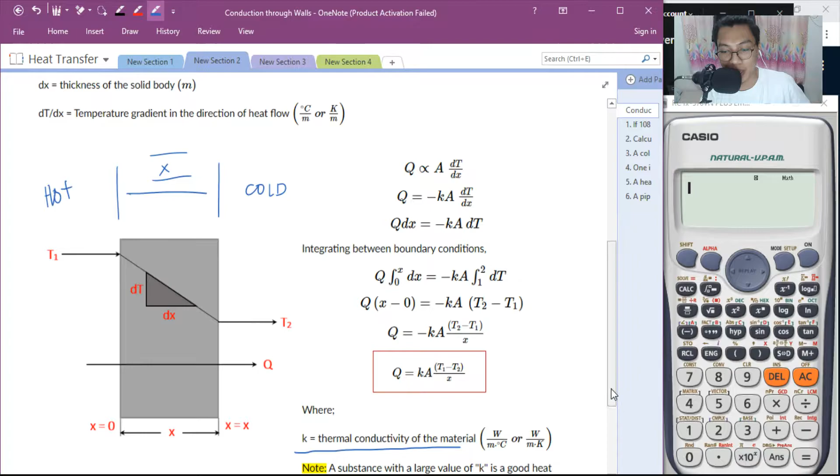What do you call that resistance? That is the thermal conductivity of the material. And it is often measured in watts per meter degree Celsius or watts per meter degree Kelvin.

Note that a substance with a large value of K is a good heat conductor. One with a small value of K is a poor conductor and a good insulator. That means a good conductor is a good heat transfer material when its K or thermal conductivity is high. But if K is very low, it's better as insulation. You have to consider that, and every material has a different thermal conductivity. There's material where no matter what you do, it will not conduct heat because its thermal conductivity is very low.

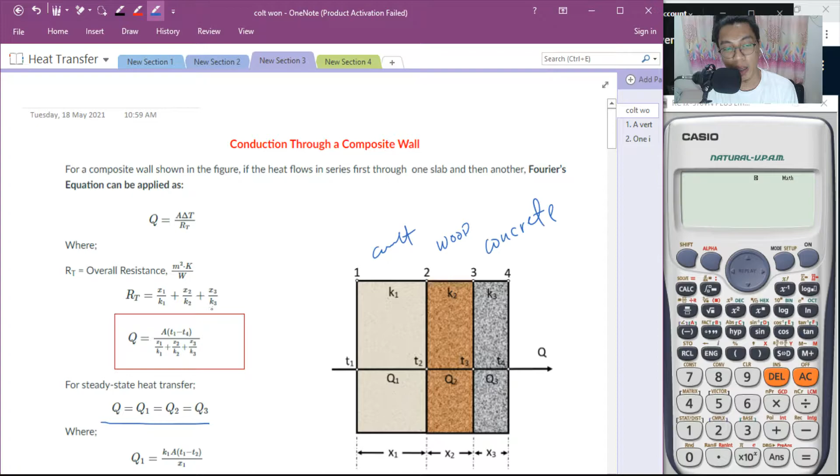Kung mapapansin mo, the flow is in series, kaya nagkaroon tayo ng series resistance. Sir, ano ba yung series resistance na yan? The overall or total resistance is the sum of all the thicknesses divided by the individual thermal conductivities of the material that is present on the wall.

So now, the resistance is, simply we put it this way. This is the overall total resistance. Yung conduction through composite wall is equal to the area multiplied to the temperature difference from hot side to cold side, divided by RT, where RT is the overall resistance, or the sum ng ratio between the thickness of the wall and the thermal conductivity.

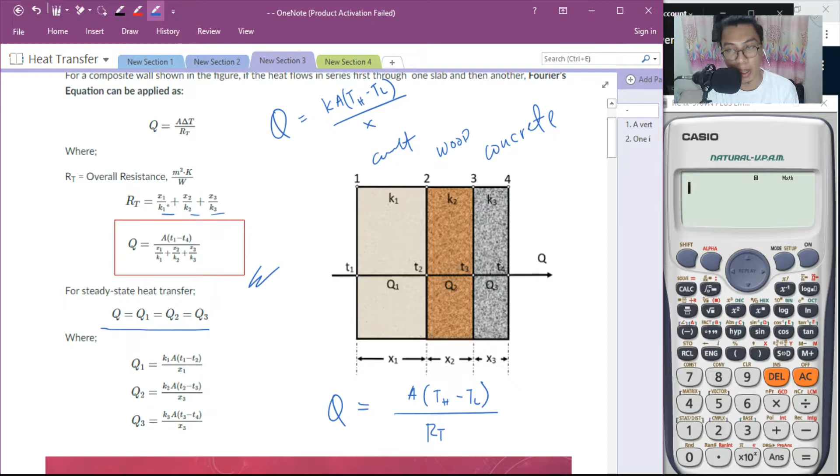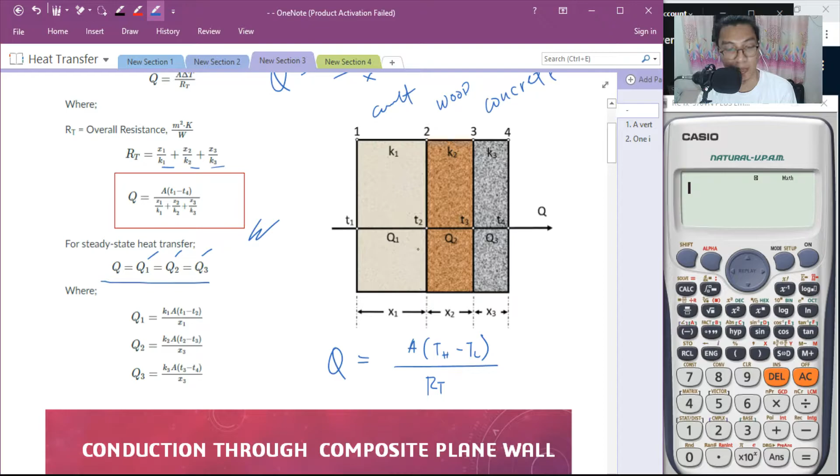Where at steady state heat transfer, the total Q is equal to, since they are in series, parang piping. Pag series, Q is equal, so Q1 is equal to Q2 equal to Q3. What's the only difference? Yung K mo iba sa bawat isa, and then yung thickness is iba sa bawat isa. Siyempre, equal man sila ng magnitude in terms of heat, magkakaiba pa rin yung transference ng temperature. And that is the conduction through a composite wall.

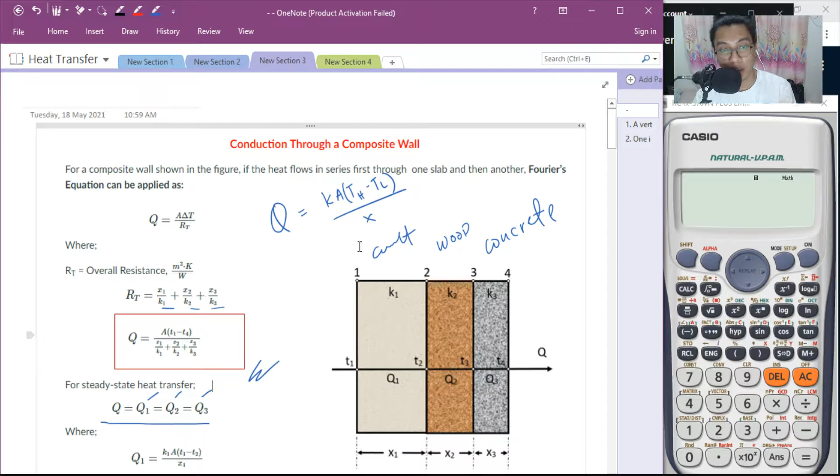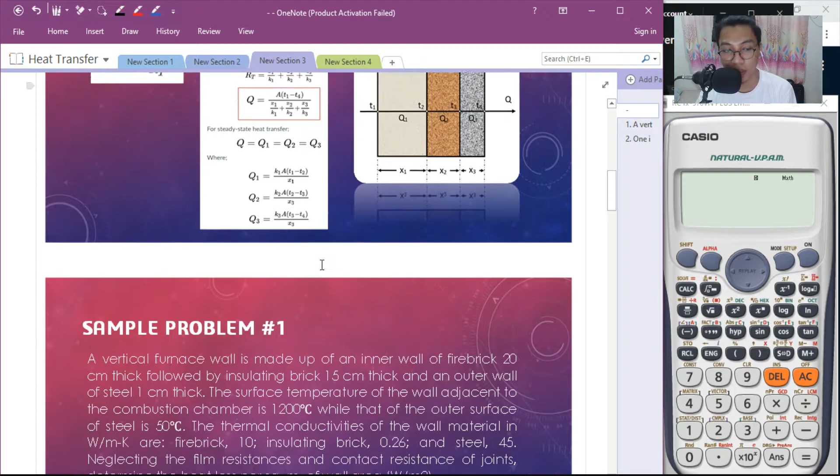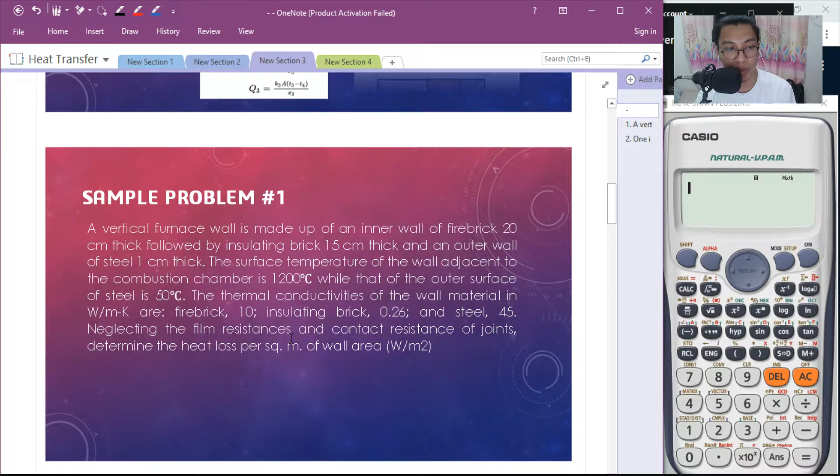Better way, naipakita natin yung solving na yan, naipakita natin yung notion kapag nag-solve na tayo ng values. Ito yung summary, and you will get the entire notes after the discussion. So you have here a couple of sample problems. Try niyo itong sample 1, this will be your activity. And sample 2, yung activity ulit.

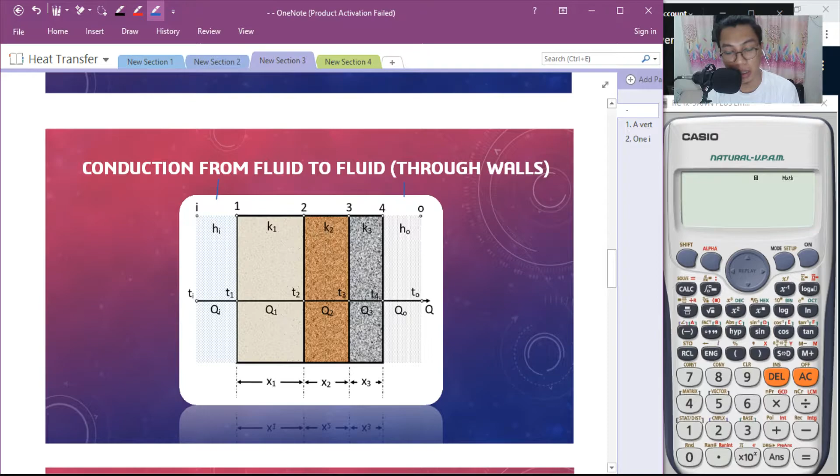Okay, let us go with conduction from fluid to fluid. Problema dito, hindi lang naman yung conduction mo is from wall to wall. Kailangan mo ring i-consider yung ambient air dito, and then the air inside or outside. So considering them, with the conduction through plane wall, iko-consider mo rin siyempre yung surface film conductance on the hot side, and then surface film conductance on the cold side.

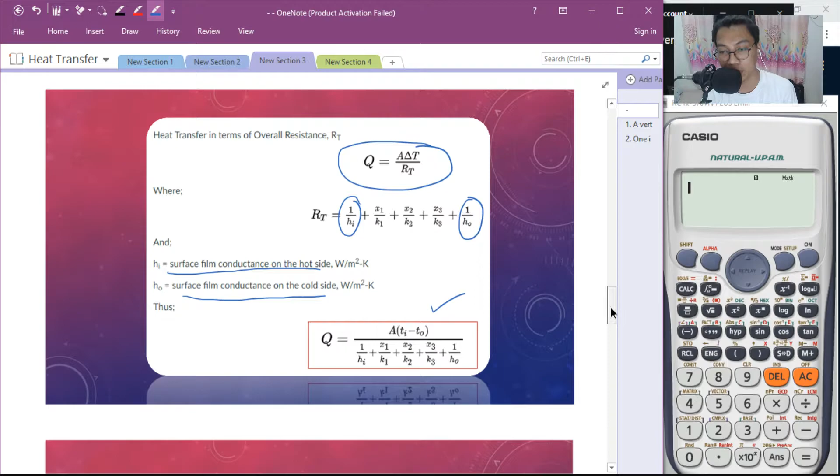Yung RT mo, itong RT na to, or the total or overall resistance, idadagdag mo ito. Pakikita ko sa inyo yung best way para isolve mo siya step by step, kasi pag nag-input ka na nito, napakahaba na nung equation. Ayan yun, so na-finalize siya.

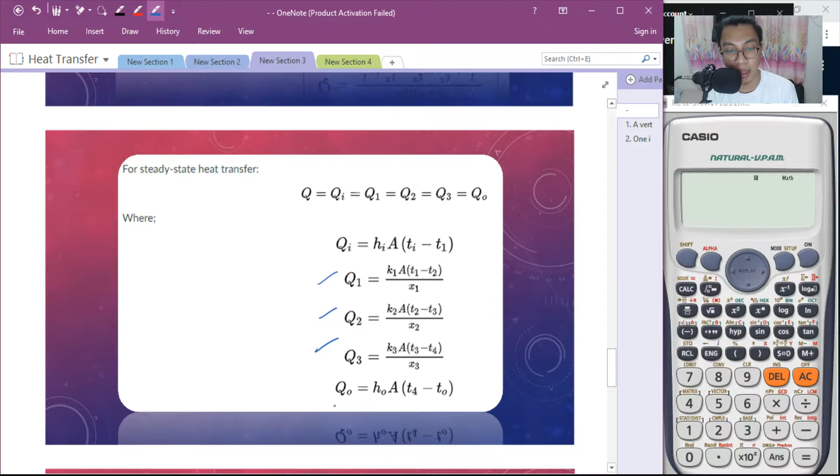With fluid to fluid, same pa rin naman, equal yan. But yung Q mo is equal to, kapag ito, kinonsider mo yung labas ha, tsaka yung loob. Ito, itong side na to, and then yung side na to. Yung Q there is equal to, may iba lang equation.

Ito yung sa walls, ito yung sa film, ito yung sa film. So HI, A, T1, TI, T1, ito rin yung sa outside. Makikita nyo mamaya pag sinolve ko yan.

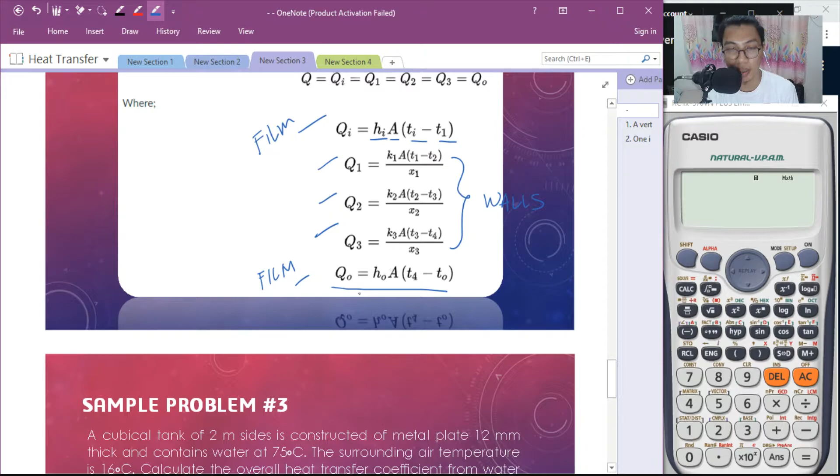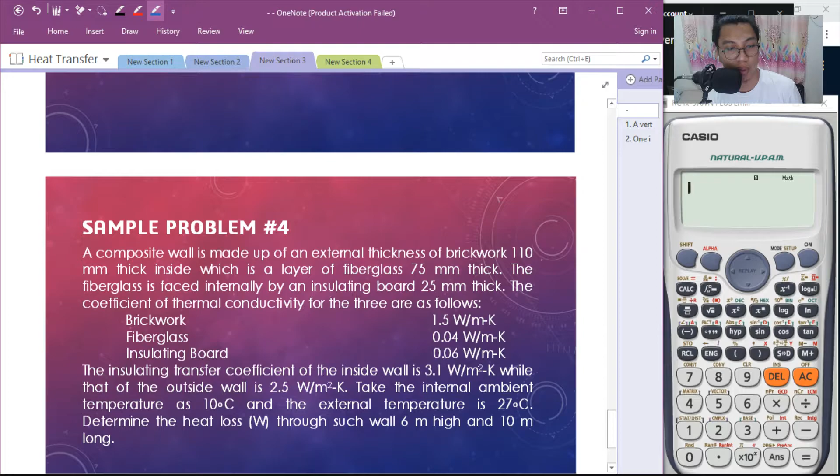Ito yung sample problem, you might as well check it. But recorded na to, recorded na siya. So what better way for us to understand it is to solve the entire problem. Isosolve ko siya, okay?

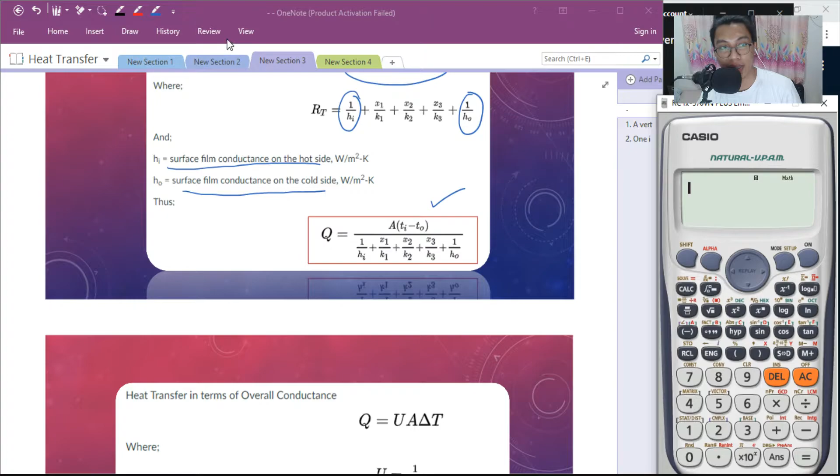So let's go to the problem sets. I have here actually 6 problems involving yung heat transfer of conduction. Okay, so let us solve this.

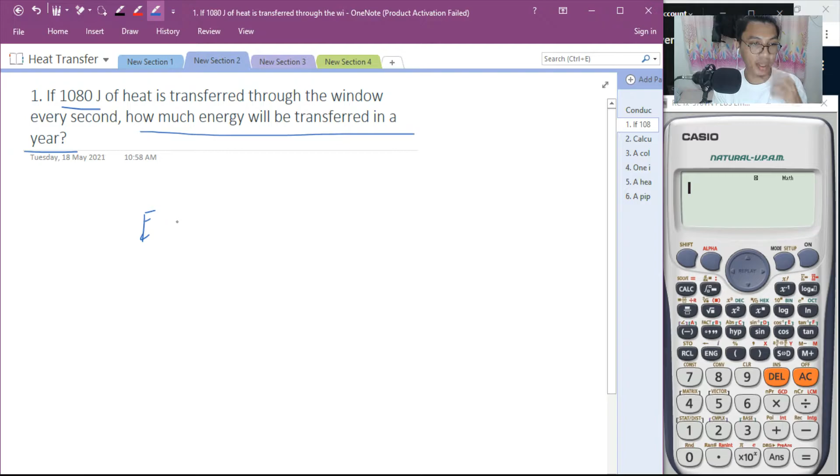So for problem number 1: if 1,080 joules of heat is transferred through the window in every second, how much energy will be transferred in a year? Di ba ang energy is measured in joules? Ang binigay sa'yo dyan is power. Tama, ayan o, the power is heat power.

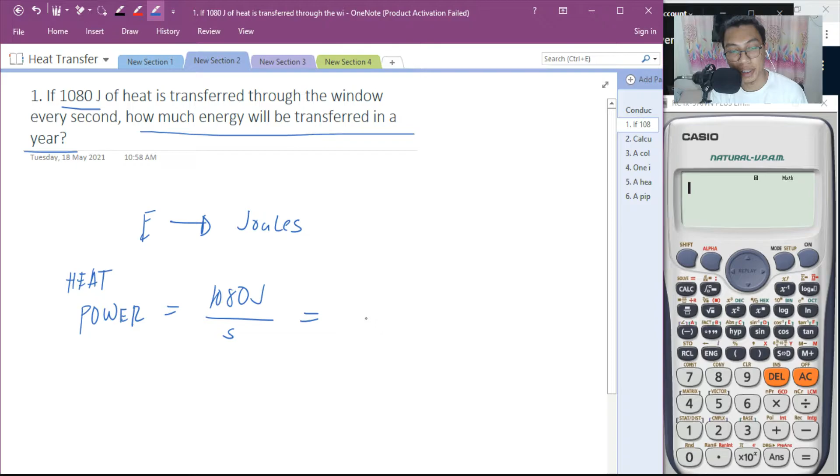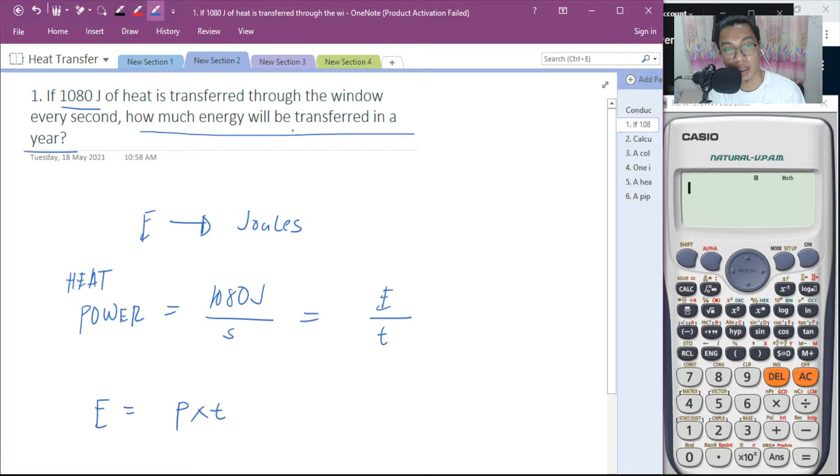So that is 1,080 joules every second. Ang hinahanap natin is the energy. Di ba ang power is equal to energy over time? So energy is equal to power times time. Ngayon, ang hinahanap natin dito is the energy transferred in a year. Very basic. So energy is equal to yung power na ibinigay sa'yo, 1,080 joules over second. Ngayon, ah, nakalimutan ko yung diretso.

Mamaya maalala ko rin yun. So, daanin natin doon sa mahabang proseso.

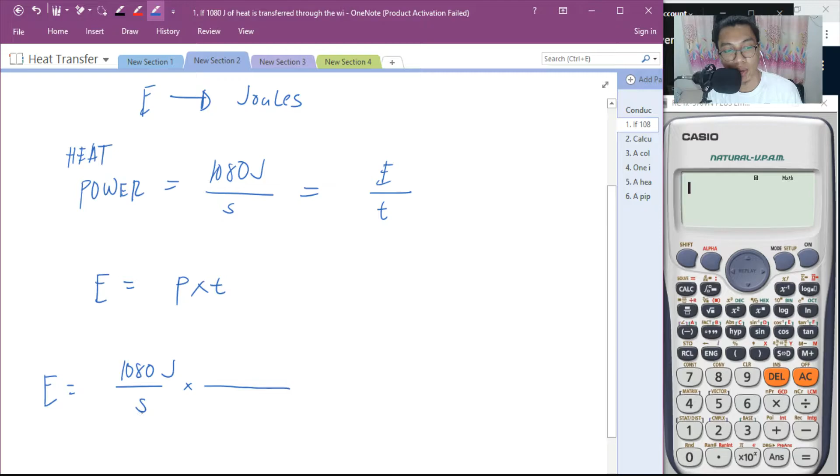Okay, so you have 60 seconds in every minute, or 3,600 seconds per hour. Ito na yung pinakamabilis. Tapos you have 360 days per year, kapag ordinary, pero pag exact, ginagawa natin 365. Tignan natin kung ilan yun. 365 times 24, days sa hours. Yan, 8,760. Tama nga. There are, in 1 year, 8,760 hours. As in 1 year, you have 365 days.

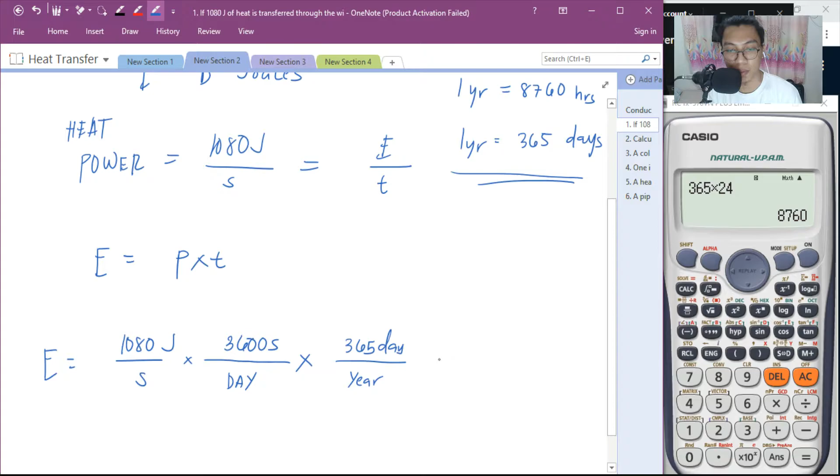Normal na yung conversion na yan. Now, ang hinahanap natin in 1 year. So multiply natin yung time. O di 1 year. Cancel yung seconds, cancel yung seconds, yung day, yung day, yung year, yung year. So you have how many joules? 1,080 times 3,600 times 365. Yan na yung pinakamabilis.

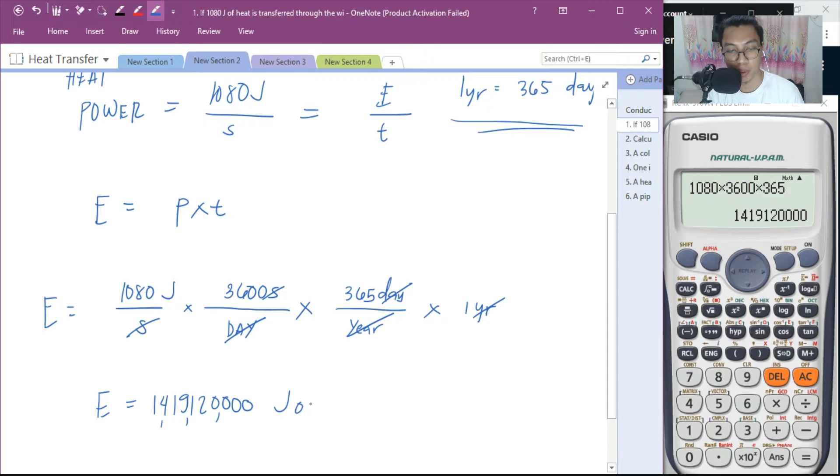Okay, the answer is, ang laki no, nung energy is equal to 1,419,120,000 joules. Yan yung energy transferred in a year. So that is for problem number 1.

Very basic lang yan. How about problem number 2? Calculate the energy transfer rate in W/m² across a 6-inch wall of fire brick with a temperature difference across the wall of 55 degrees Celsius. The thermal conductivity of the fire brick is 0.65 BTU per hour degree Fahrenheit.

Sir, meron ba tayong conversion unit dito? Yes, we have a conversion unit there. Lo and behold, sasama ko na yung pinakamabilis na paraan para makalculate mo siya.

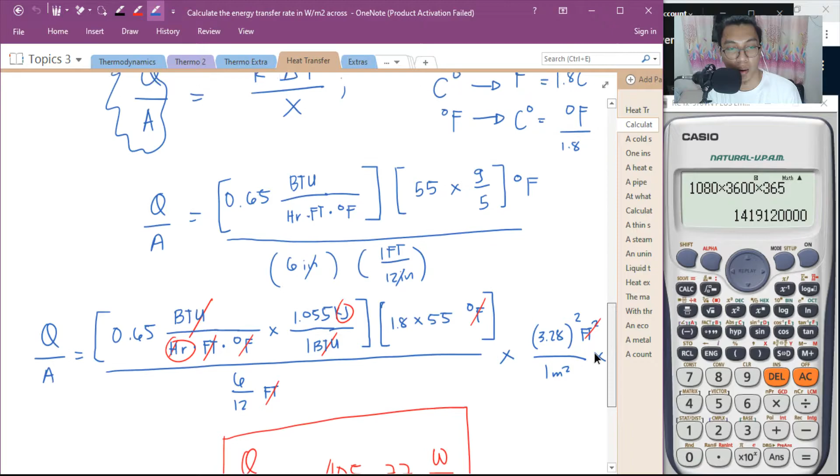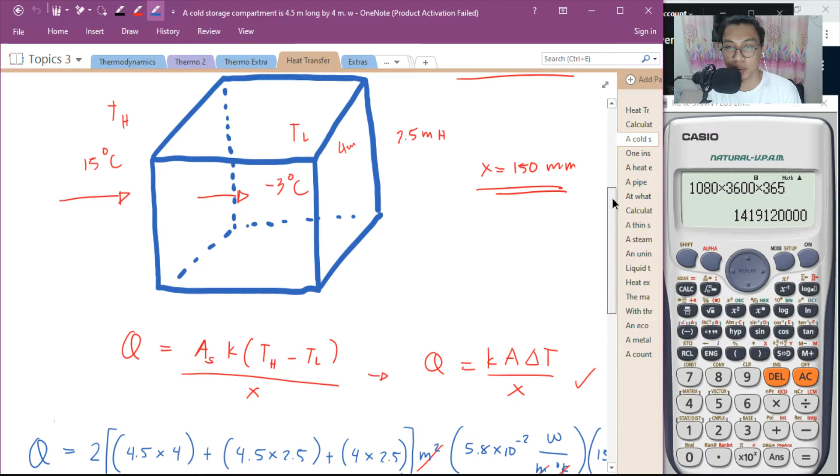Alam ko meron yung diretso eh. Hanapin ko lang kung saan nilagay dito. Well, anyway, sige. Proceed tayo para hindi tumagal.

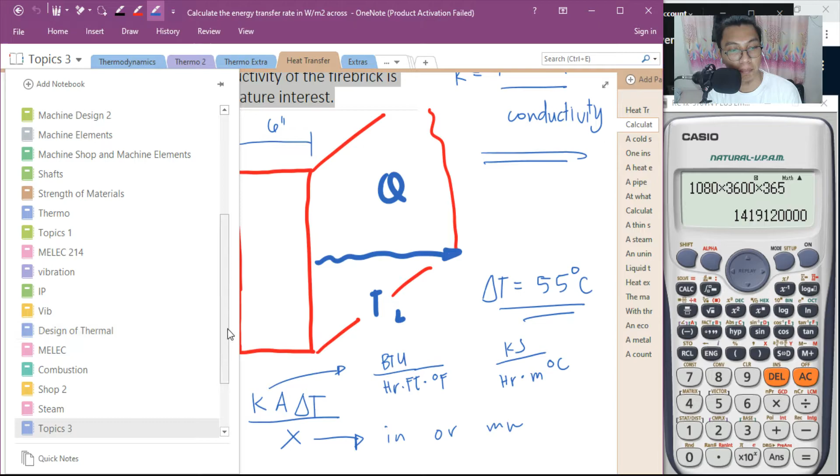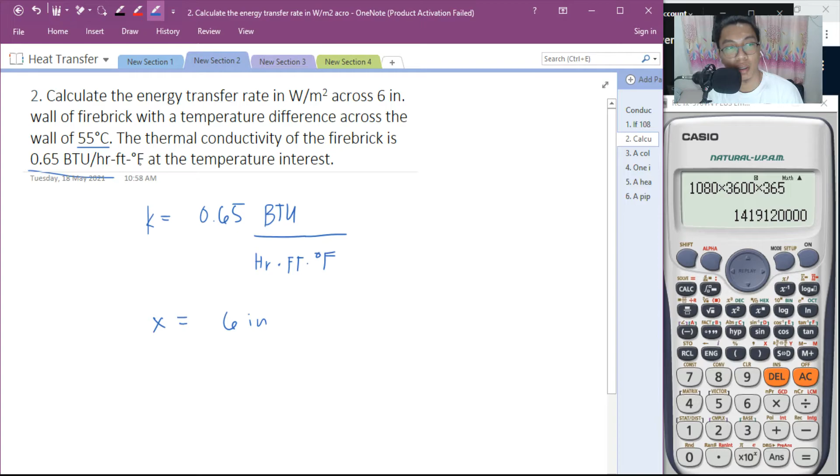Ang given niya, meron kang K, 0.65 BTU per hour, feet, degree Fahrenheit. And then, given yung kanyang X, which is 6 inches. And then, yung temperature difference, which is 55 degrees Celsius. Now, ang kinakalculate natin dyan is yung Q over A. Yan ang tinatanong.

So better for us to draw it first. Drawing muna natin yung wall. You have the wall here, okay, yung wall mo. Now, magpapass through daw dyan yung heat. Tapos yung X mo dyan is 6 inches. Ayan, so this is brick. And then yung delta T is equal to 55 degrees Celsius.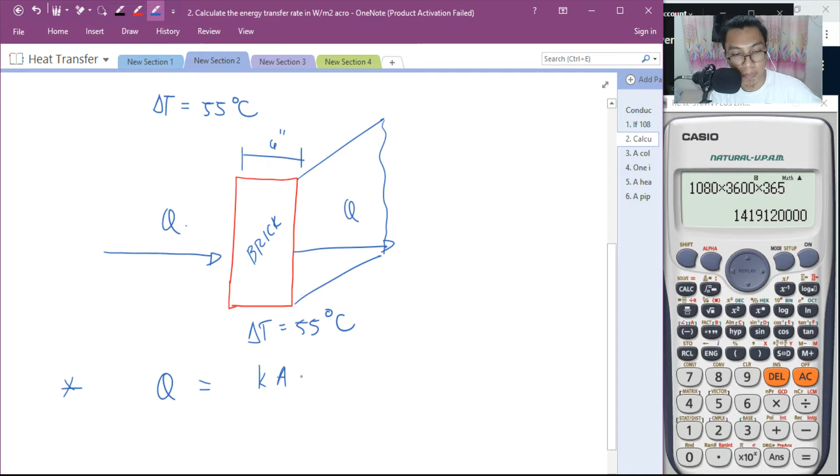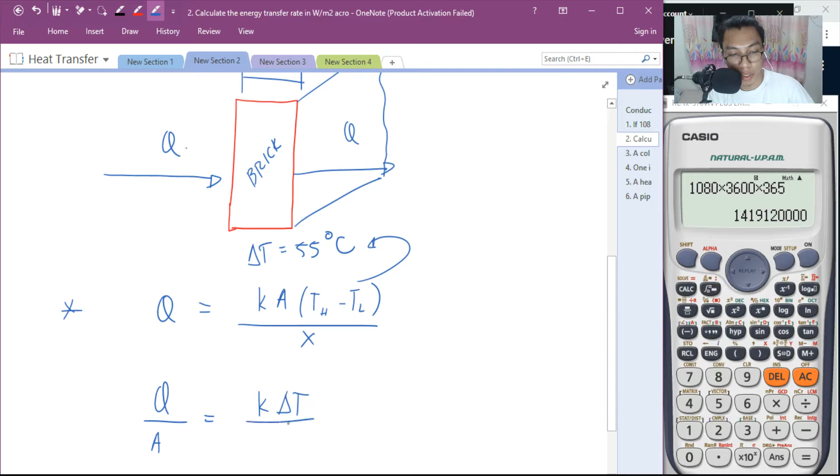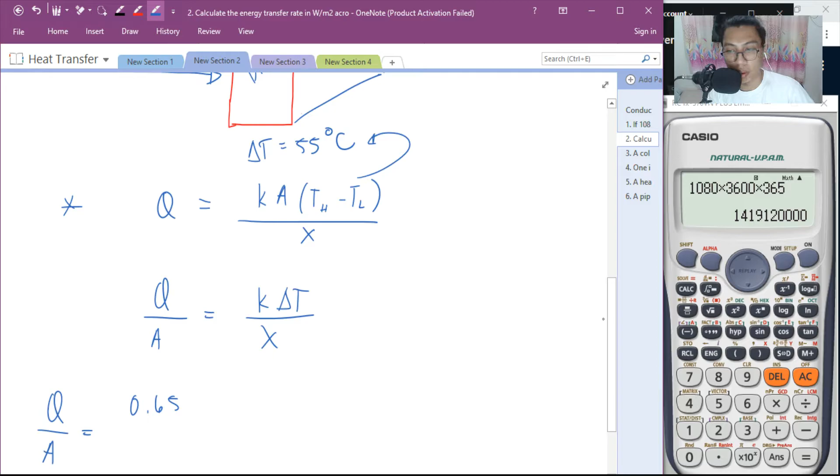Now let us solve. Q over A is equal to, yung K dyan, 0.65 BTU per hour feet degree Fahrenheit. Tapos yung delta T, that is 55 degree Celsius. Naalala nyo ba na kapag change in temperature, okay, Fahrenheit to degree, Celsius degree, pag nauna yung degree, that is hindi siya change in temperature.

Temperature lang talaga siya. Pero pag nahuli yung degree, that is change in temperature. Now, from degree Fahrenheit to degree Celsius, ang change niyan, all you have to do para maging Celsius siya, yung degree Fahrenheit mo, divide mo ng 1.8. Okay, para maging Celsius degree. Now, how about naman yung degree Celsius to degree Fahrenheit? O simple lang, ang gagawin mo dito is i-multiply mo ng 1.8 yung degree Celsius para maging Fahrenheit degrees. Ito yung kanilang conversion. Or simply, yung isa, multiply mo ng 5/9, yung isa, i-divide mo ng 9/5.

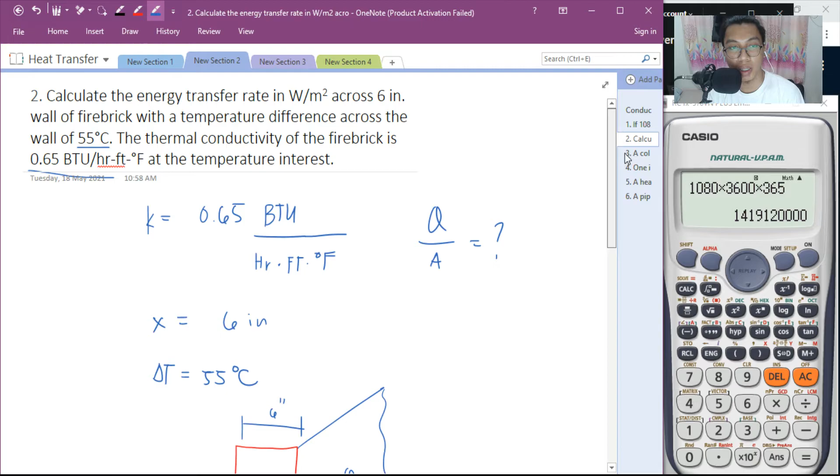Okay, so let us proceed. Yung x is 6 inches. Tignan mo muna, anong hinihingi sa'yo na unit? Ang hinihingi sa'yong unit is watt per meter squared, naka-SI. Ilan ang naka-ano sa'yo dyan? Ilan ang naka-English? 1, 2, 3, 4. Lahat sila naka-English, di ba? So I want it to become in SI.

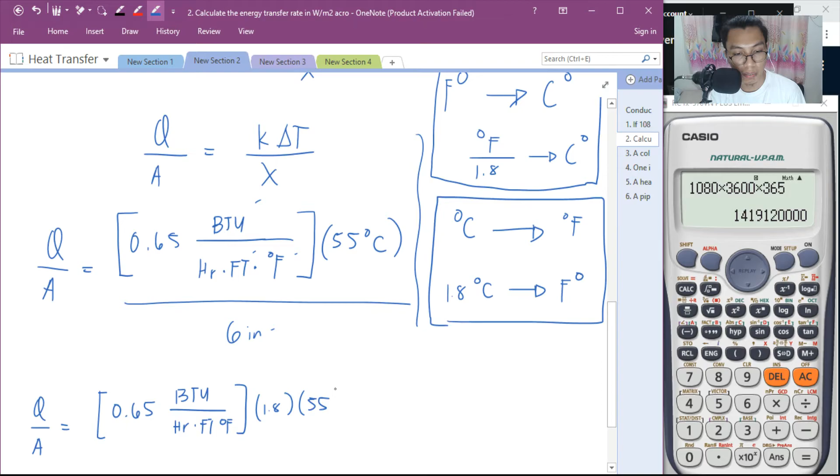So all you have to do is QA, Q over A is equal to 0.65 BTU per hour, feet, degree Fahrenheit. Okay, ito i-multiply ko ng 9/5 or 1.8. 1.8 multiplied to 55, magiging Fahrenheit degrees yan. Okay, and then yung 6 inches ko, i-multiply ko ng 1 feet per 12 inch. Tignan natin kung may nakakancel.

Okay, may kulang pa dyan. Cancel muna natin yung mga dapat natin i-cancel. So yung Fahrenheit degree, yung feet, yung feet, yung inch, yung inch. Yung hour, ang problema mo dyan. Okay, madali lang naman yan. So all you have to do is, hindi ko kinancel yung feet, actually magiging feet squared yan.

So ang lalabas na unit dyan is 0.65 BTU. 0.65, maya mo na i-multiply, times 1.8 times 55 per 0.5, kasi 6/12 is 0.5 or 1/2. Tapos ang unit niya is BTU per feet squared. Yun yung natira. Tapos meron kang hour, hindi mo na na-cancel to eh.

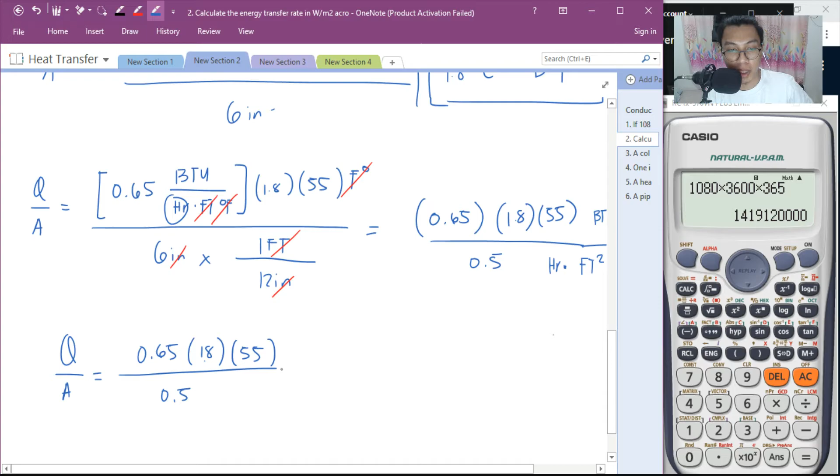Okay, ito yung natira. So anong gagawin mo dyan? Simplify mo pa. Q over A is equal to 0.65. Mamaya mo na i-multiply yung unit, muna pansin natin: 1.8 times 55 over 0.5. Yung conversion factor. Ano bang pinakamadali para ma-change mo yung BTU? BTU per hr degree.

Degree? Hindi pala, hr feet squared. Kailangan natin watt per meter squared.

Meron tayong conversion factor na there are 1,055 joules per 1 BTU. Tapos meron tayong 3,600 seconds in 1 hour. Tapos ang pinupunto natin dito is meter squared.

Meter squared. So there are 3.28 feet in every meter. Kaya lang naka-square siya, so i-square natin. Now for the cancellation of units, we have feet squared, feet squared, feet squared, yung BTU, BTU, yung hour.

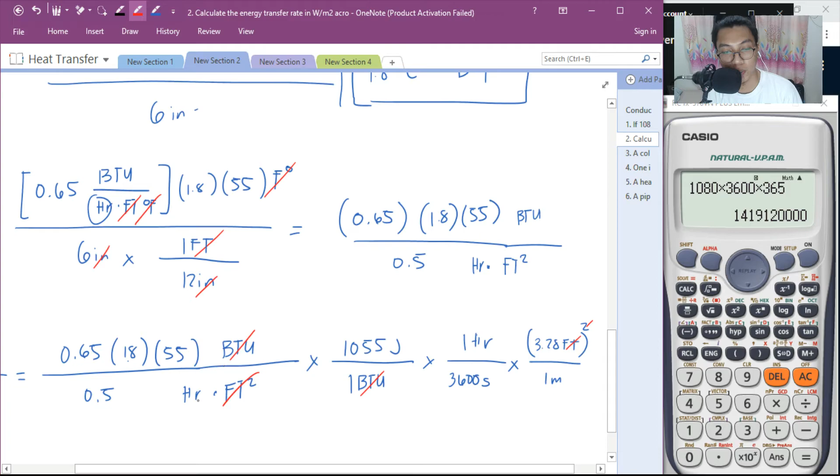Ano natira? Joule per second. Ibet yung joule per second is watts per, naka-meter squared dapat to. At i-square natin, ayan, meter squared. Per meter squared. Now we arrived with the required unit.

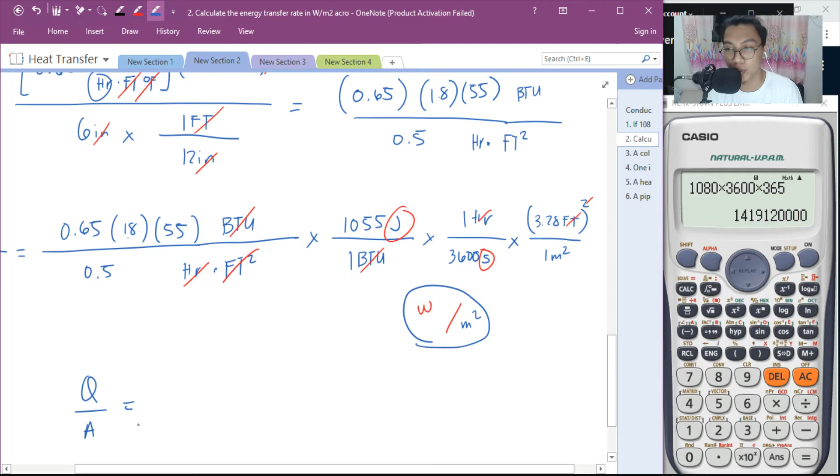So we can now solve for Q over A. So Q over A is equal to 0.65 times 1.8 times 55 times 1055,

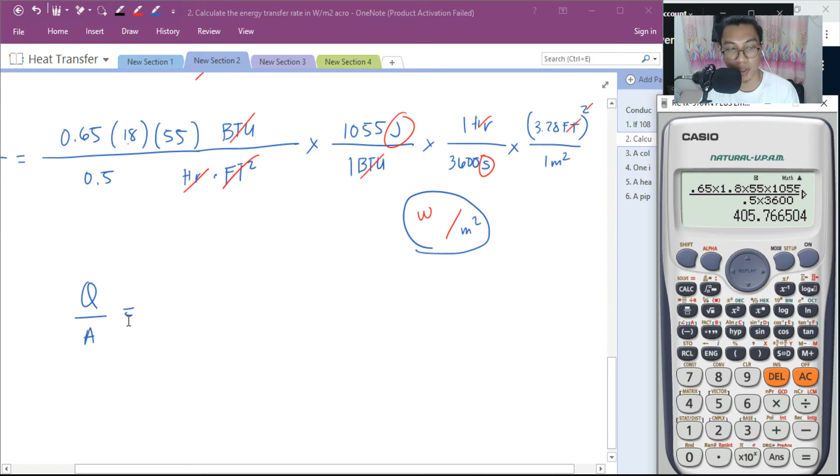times 3.28 squared divided by 0.5 times 3600. The answer is 405, very basic, 405.77 watt per meter squared.

This is very basic problem. Okay, that is for problem number 2. How about problem number 3?

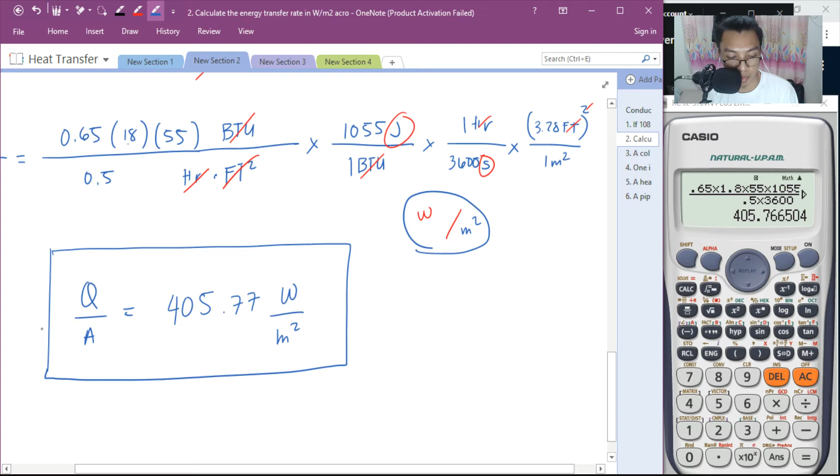A cold storage compartment is 4.5 meters long by 4 meters wide and 2.5 meters high. So you have a room there. Drawing natin yung room.

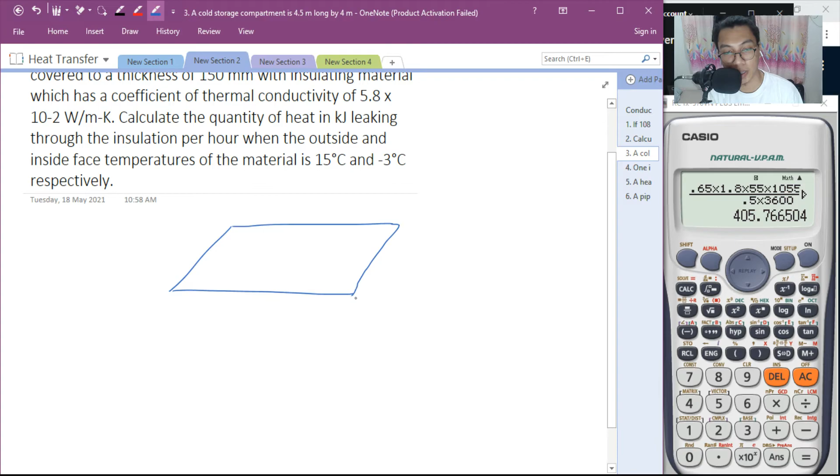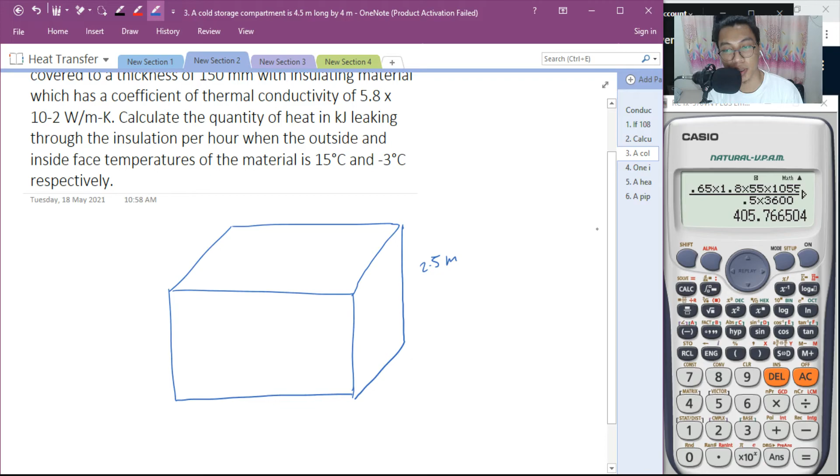Okay, ito yung bahay, wala tayong bintana. Yan daw yung room. So this is 2.5 meters. Tapos 4.5 meters long. Tapos wide, 4 meters. Basic. Now this is the room.

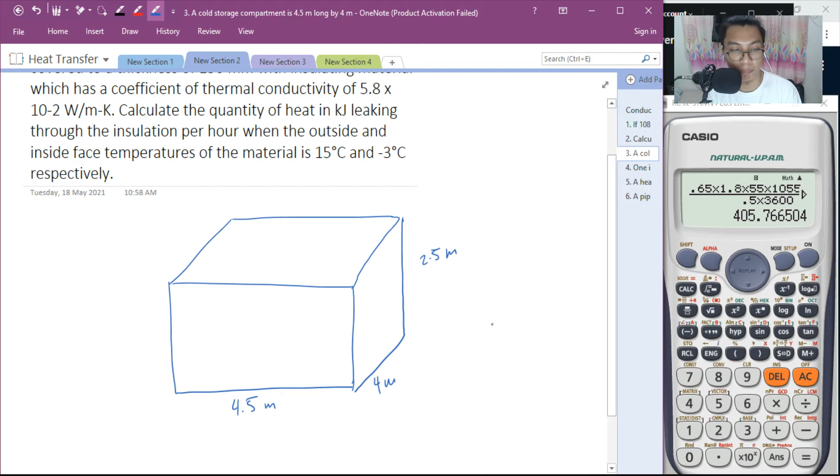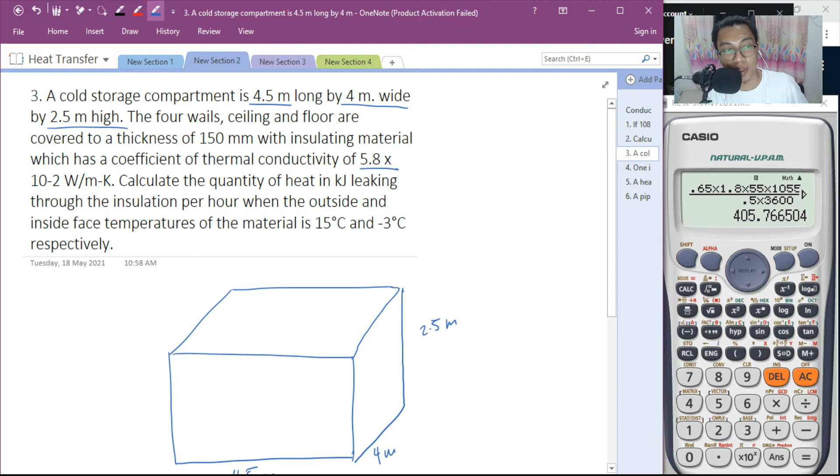So the four walls, walls to walls, ceiling and floor are covered to a thickness of. So meron daw thickness yung wall mo, kung ito yung walling, a piece of walling, that is 150 millimeters, with insulating material which has a coefficient of thermal conductivity of 5.8 times 10 to the negative 2 watt per meter degree Kelvin. So yun yung thermal conductivity K, 5.8 times 10 to the negative 2 watt per meter degree Kelvin.

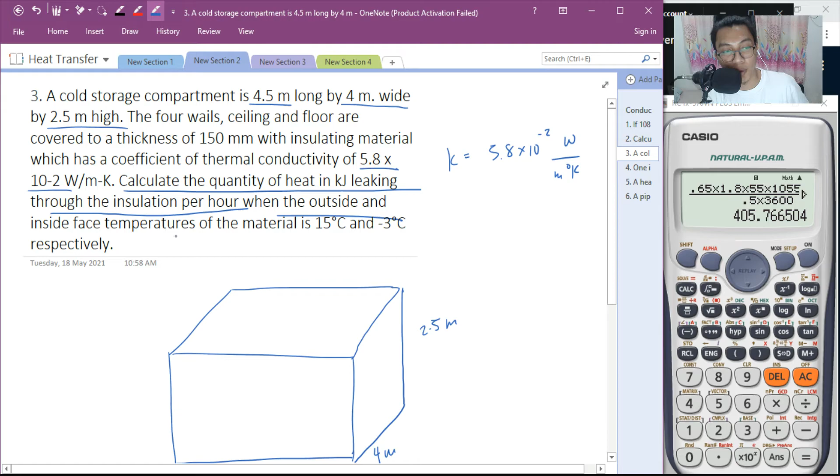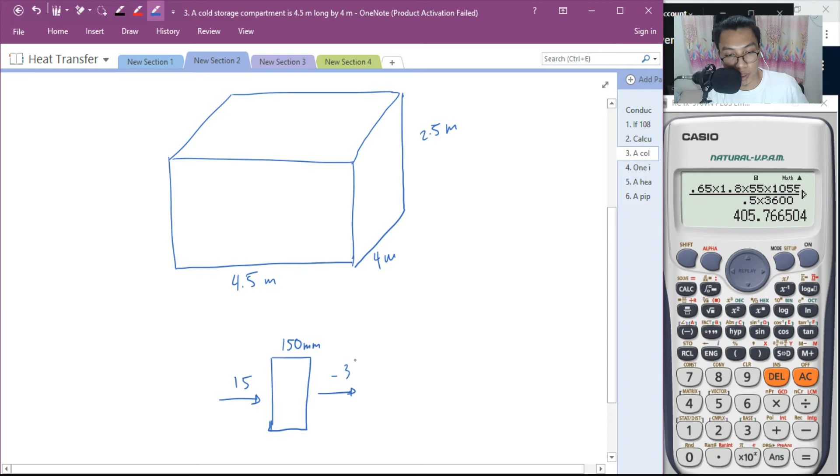Calculate the quantity of heat in kilojoule leaking through the insulation per hour when the outside and inside face temperatures of the material is 15 and negative 3 degrees Celsius. So dito yung hot side, 15. Inside is negative 3 degrees Celsius. Okay, let us solve.

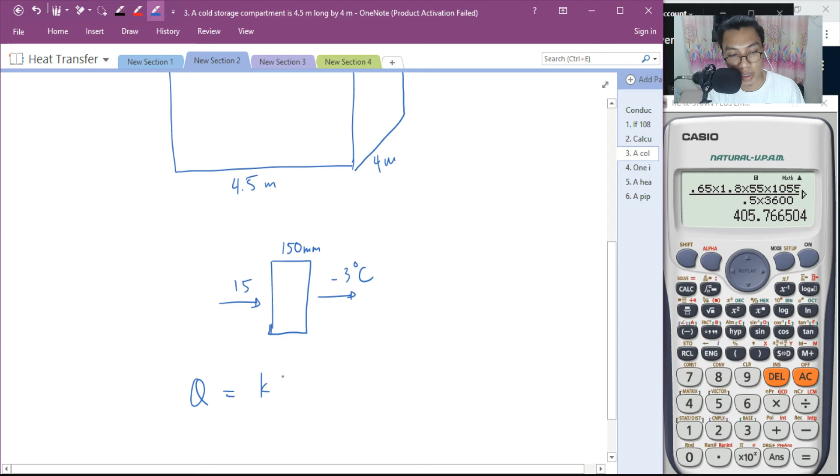Going back, conduction through walls, that is Q is equal to K A delta. Now yung Q is equal to K, given na yun, that is 5.8 times 10 to the negative 2 watt per meter degree Kelvin. Tapos yung area, surface area ang pinag-uusapan natin dito.

Tapos yung change in temperature from hot side to the cold side, that is 15 minus negative 3 degree Kelvin over yung X which is 150 millimeter.

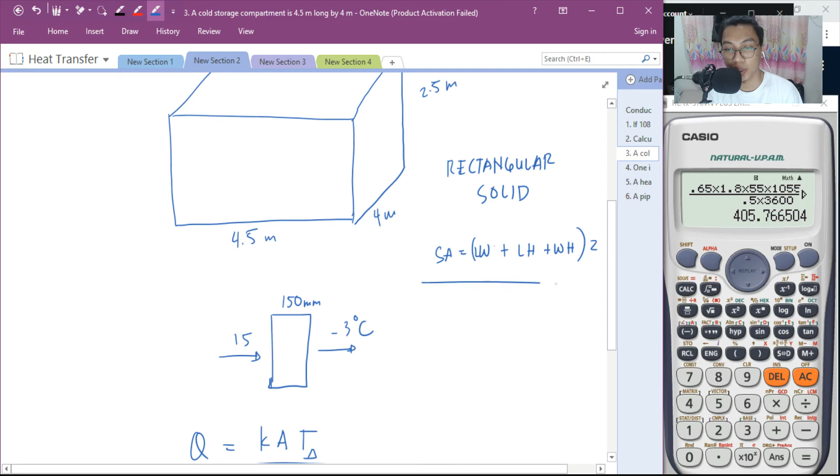Okay, ngayon tignan nyo yung surface area of a rectangular solid. Ano yung surface area niya? Now the surface area niya is equal to length times width plus length times height plus width times height, multiply to 2. Yan yung kanyang surface area. Go back to your solid mensuration.

Maalala nyo ito, okay? Now yun na yung dilemma natin. So Q will be equal to, natapos na, okay: 5.8 times 10 to the negative 2 watt per meter degree Kelvin. Yung surface area is 2 times 4 times 4.5 plus 4 times 2.5 plus 2.5 times 4.5, and that is meter squared.

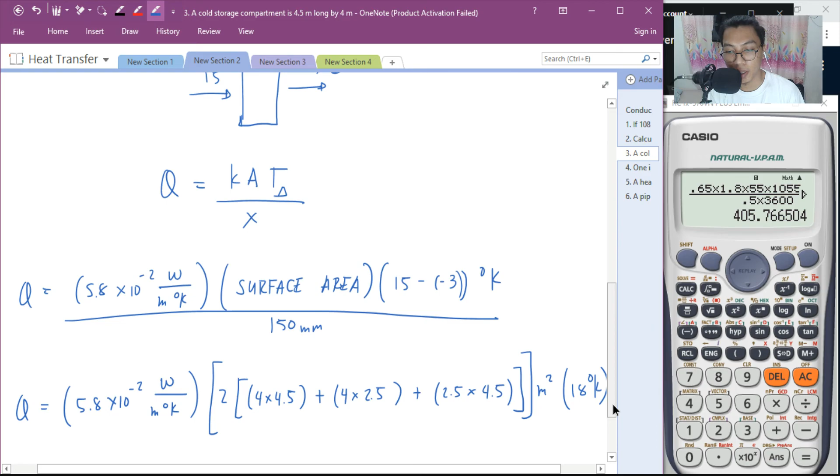Multiplied to ito, maging 18 degree Kelvin, and then divide by 150 millimeter. Kaya lang kailangan maging meter, o di 150 divide by 1,000 para maging meter. Diretso na yon, so we cancel all the same units.

That is meter, meter squared, Kelvin, and Kelvin. So ang natira is watts na lang. Okay, let us solve.

That is 5.8 times 10 to the negative 2, times 2, times 4 times 4.5 plus 4 times 2.5 plus 2.5 times 4.5,

times 18, divide by 0.15. The answer is 546.

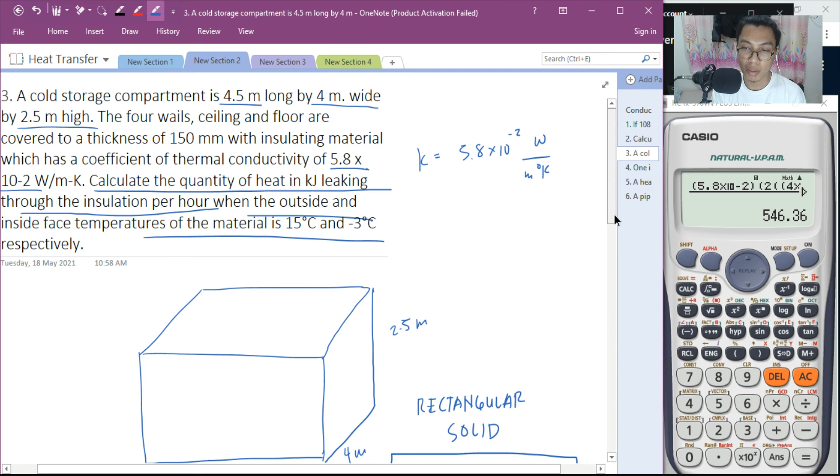So Q is equal to 546.36 watts. Pero anong required natin dyan? In kilojoule through the insulation per hour. Per hour. Okay, so i-multiply pa natin to, kasi ito, joule per second to eh.

Okay, there are 1,000 joule per 1 kilojoule. Times, ito, joule per second, di ba? There are 3,600 seconds per 1 hour. So maka-cancel natin yung units dito ng joule per second. Palitan ko na ito ng joule per second, yung watts.

Joule per second, cancel the same units, the joule, yung seconds. Ang natira is kilojoule per hour. That is the required unit. So you multiply it with 3.6 na lang, kasi 3,600 divided by 1,000 is 3.6.

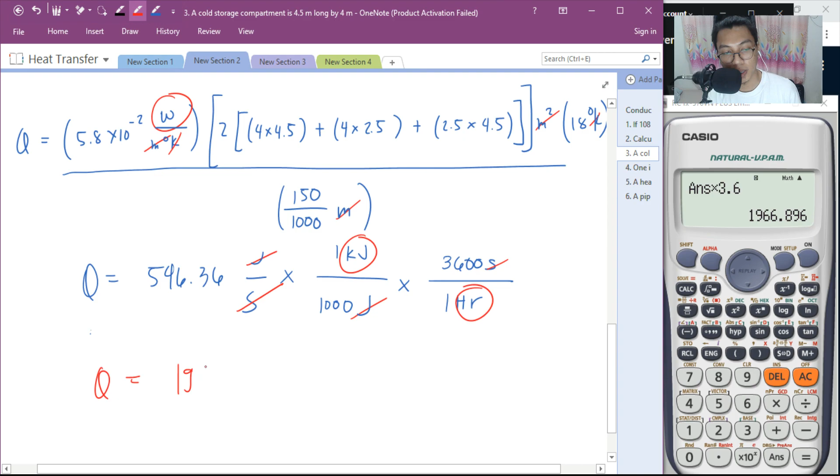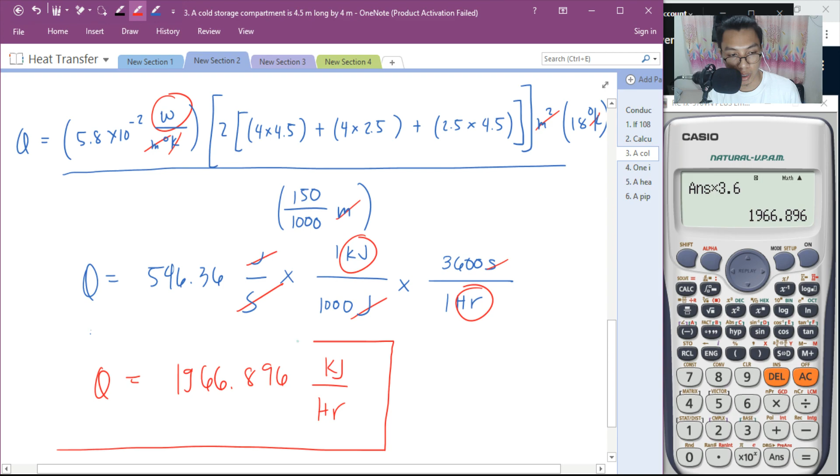The answer will be 1966.896 kilojoule per hour. That is problem number 3. Very basic problem, okay? Very basic.